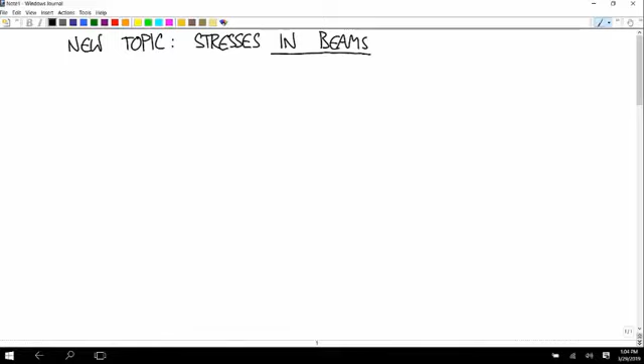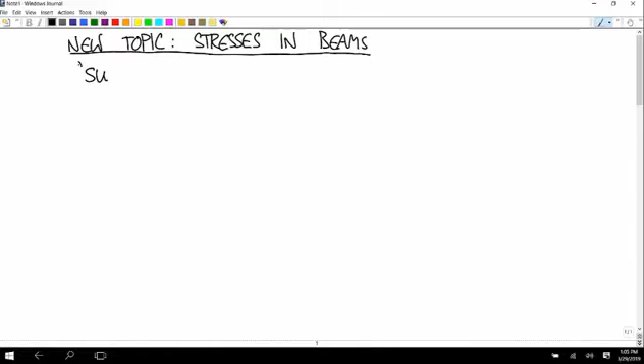The idea is based on the superposition principle, and that's a pretty common thing when you have small deformations. In our case, we're talking about small deformations. But anytime you have small perturbations from some reference position, that's when the superposition principle can come up. It's such a cool name for such a simple thing.

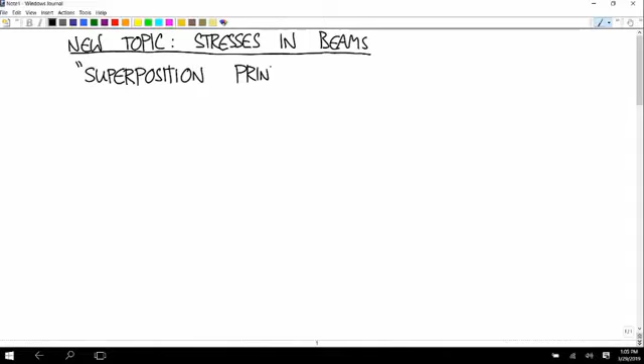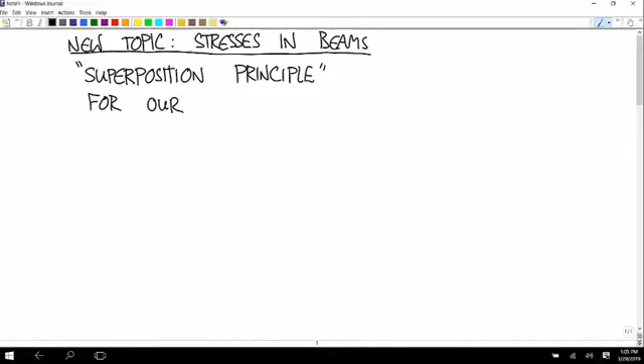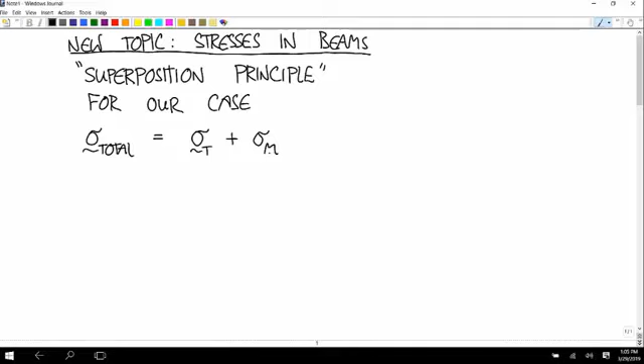The idea is just that, for our case, the only thing that matters is the fact that the deformations are small. The total stress tensor in a beam is equal to the stress tensor due to tension plus the stress tensor due to bending moment plus the stress tensor due to the shear force plus the stress tensor due to the torque. When I talk about adding these stress tensors, they add the same way vectors do, just element by element.

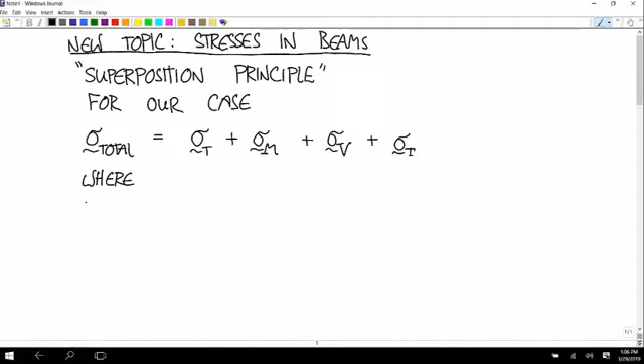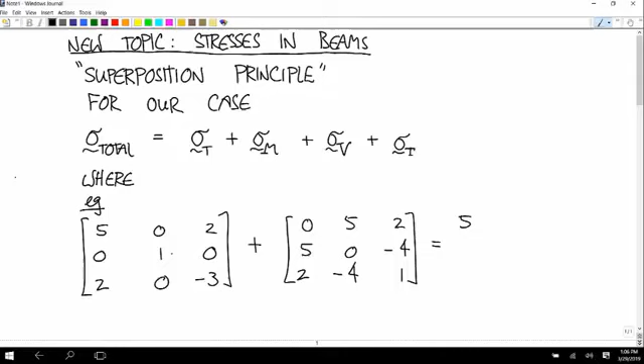For example, if you have stress tensor 5, 0, 2, 0, 1, 0, 2, 0, -3, and you add that to 0, 5, 2, 5, 0, -4, 2, -4, 1, you just add them up element by element. So 5 plus 0 is 5, 0 plus 5 is 5, 2 plus 2 is 4, 5 plus 0 is 5, 1 plus 0 is 1, 0 plus -4 is -4, 2 plus 2 is 4, 0 minus 4 is -4, and then -2.

I made those two symmetrical, and notice that if the two you're adding are symmetrical, the result also comes out symmetrical. So you never have to worry about adding stress tensors and getting something that can't be a stress tensor.

The reason this works is basically, you can imagine if you bend something really sharply, all the way down to a very noticeable angle, and then applied tension to it, those loading patterns would react in some unpredictable way. But if all these things are very close to their original configuration, because we're talking about very small deformations, you have to worry about that a lot less. You get good accuracy by just calculating those loads independently. First think about a bar that's in pure tension, calculate the stress tensor. Now think about a bar in pure bending moment, calculate the stress tensor. So that's what we're going to do, add them all together at the end.

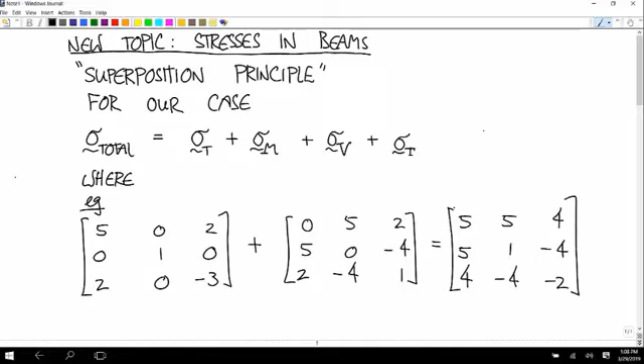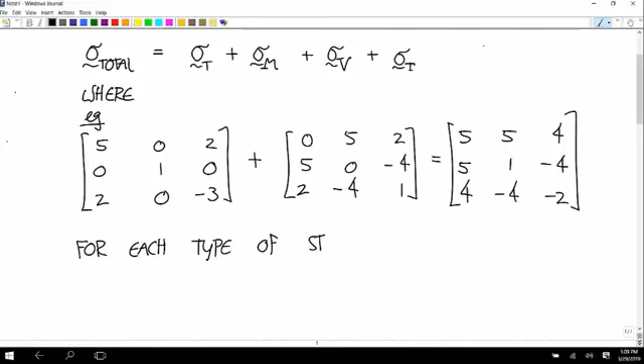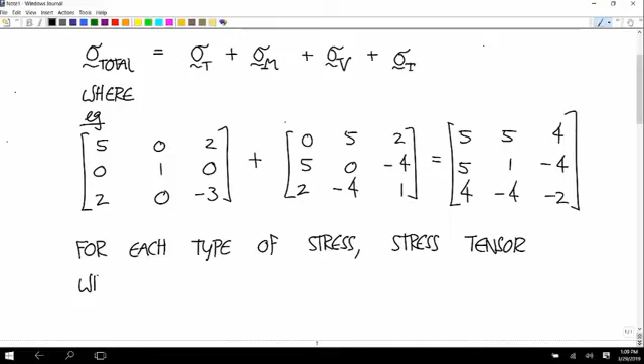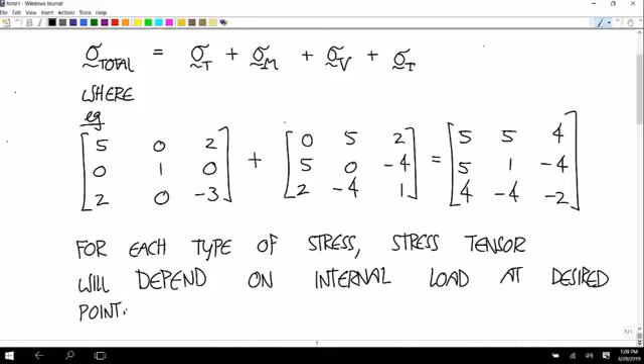And the general idea is, for each type of stress, the stress tensor will depend on the internal load at the desired point. So all the stuff we just went through for internal loads is going to be the starting point for the stress calculations. We're going to start with the easiest case.

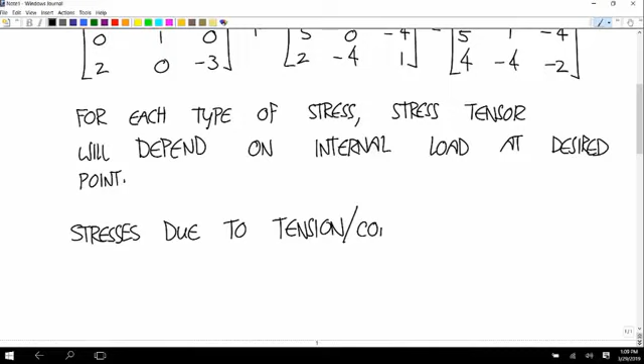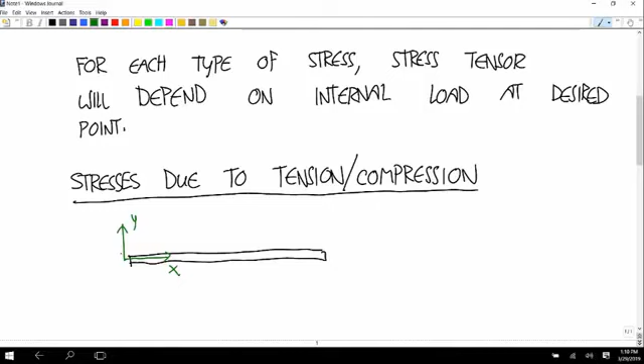So stresses due to tension and compression. We're going to use the coordinate system we've used in all our internal loads calculations, where the x-axis is along the length of the beam, the y-axis is up, and the z-axis is out towards us.

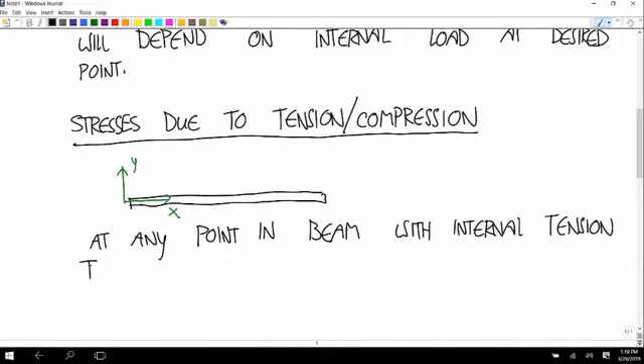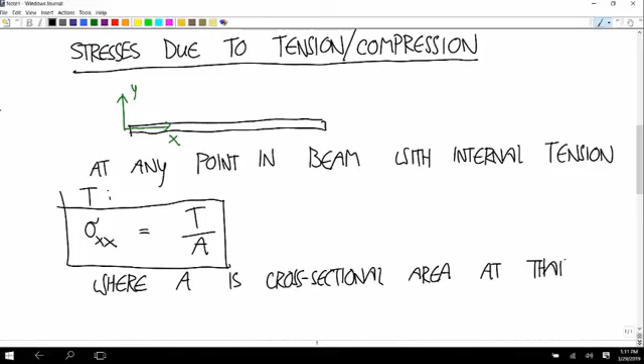At any point in the beam that has an internal tension T, the normal stress in the x direction is equal to T over A, where A is the cross-sectional area at that point. This doesn't say anything about where on the cross-section you are, because over the whole cross-section the stress is the same. It doesn't matter if you're near the top of the beam or the middle of the beam or whatever - all that matters is the x position.

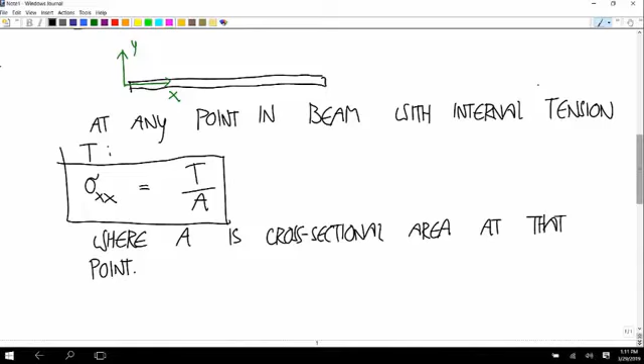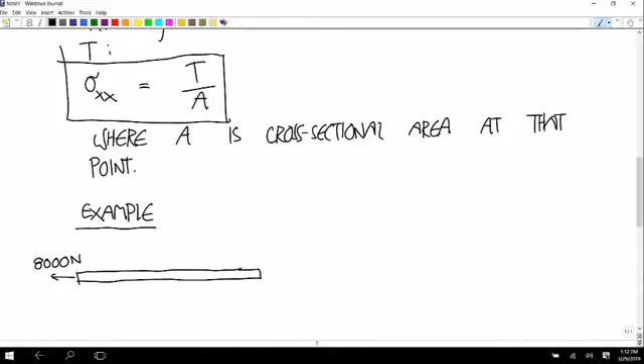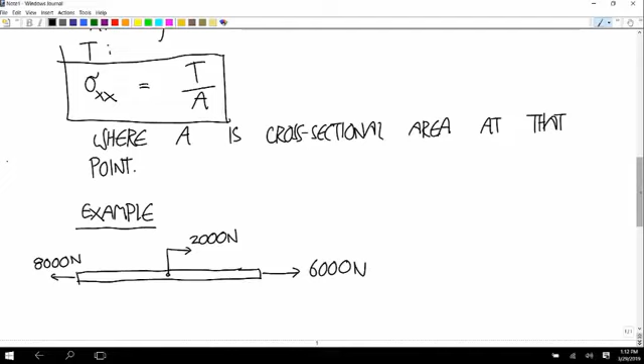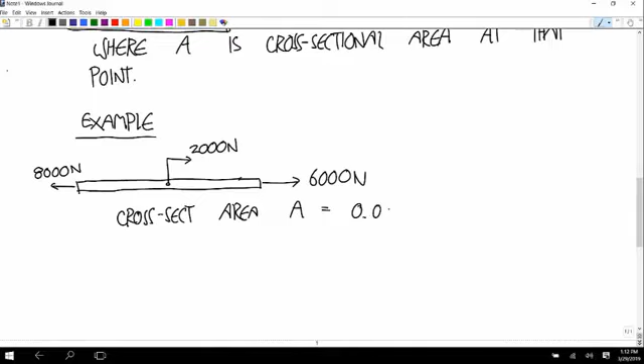Let's do an example. Let's say we have a beam where, when we figure out the external loads, there's an 8,000 Newton force at the left end, at the middle there's a 2,000 Newton force, and at the end there's a 6,000 Newton force. And the cross-sectional area, let's say it's constant over the whole thing at 0.001 meters squared.

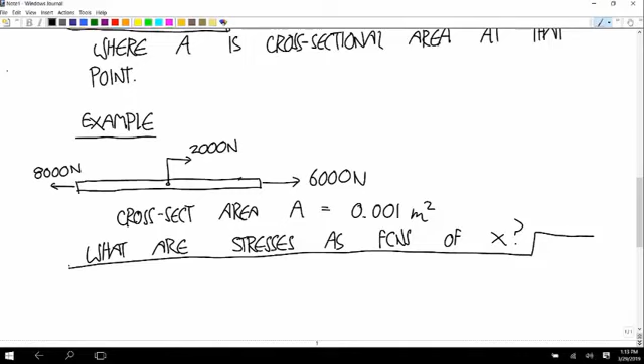So what are the stresses as functions of x? How is the stress in the beam going to change as you go along the length? We're always going to start by calculating the internal loads. So how many cuts do we have to make? Normally we'd have to calculate the external loads, but they're already given. Two cuts, yep. So the first cut is going to be for x between - I didn't say how long this was. Let's say 0.5 meter each.

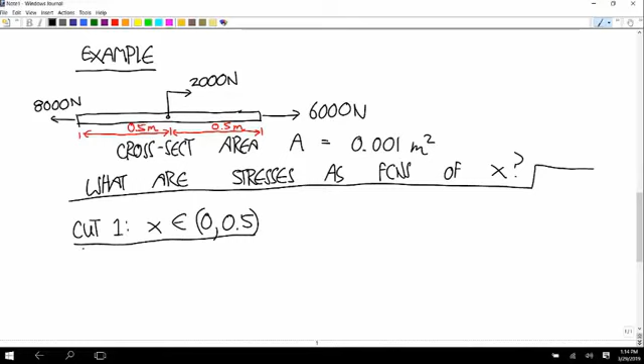Okay, so the first cut is from 0 to 0.5. We'll take some representative cut. We have the 8,000 Newton force at the left end, but we haven't gotten to the 2,000 Newton force yet. So the only other loads are the tension, the shear force, bending moment - all that stuff's going to be zero. All we have is forces along the x-axis here, so I'm just going to write it like this. But if you wanted to go through the full calculation, you could calculate shear force is zero, moment zero, fancy T is zero.

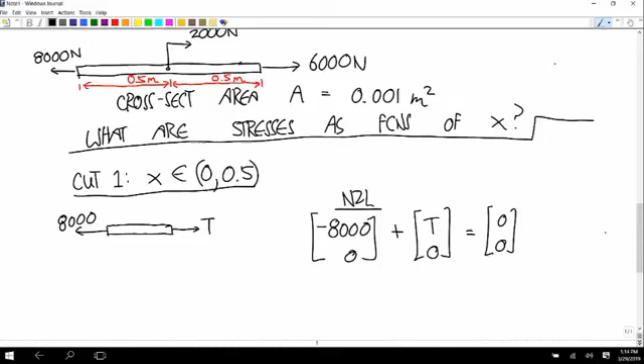And then Newton's second law says negative 8,000 plus T equals zero. So we got that T is equal to positive 8,000 for every x value between 0 and 0.5. And that's a positive value, so that means that that whole piece is in tension.

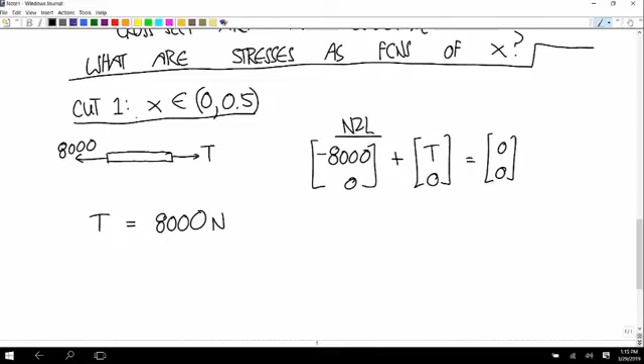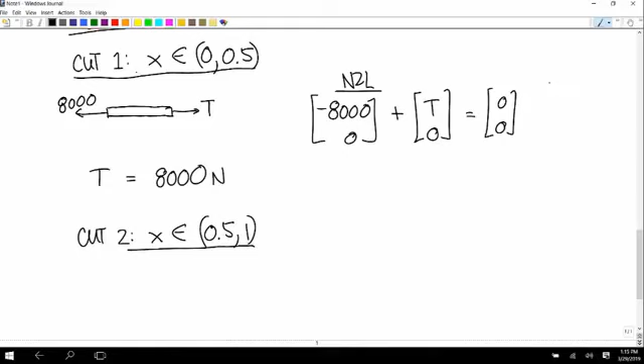And now cut 2 is between 0.5 and 1. So now we have the 8,000 here, and now somewhere else we have the 2,000 going the other way, and the tension. Newton's second law says negative 8,000 plus positive 2,000 plus T equals zero. And so T is equal to 6,000.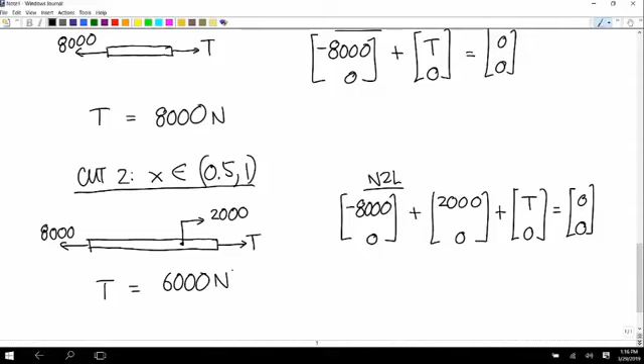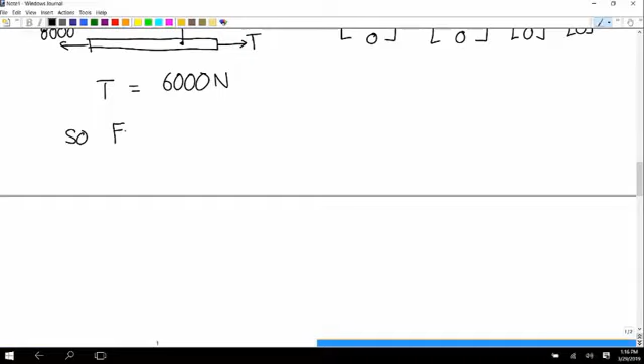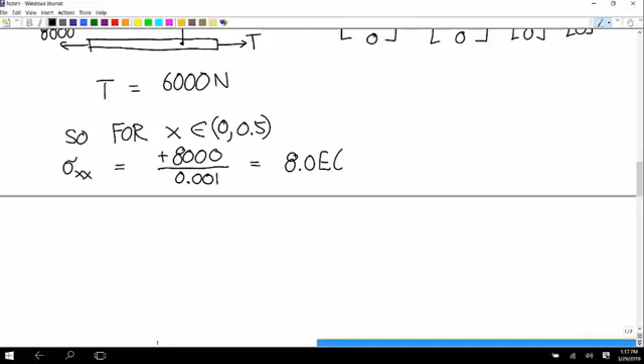So now that we have the internal loads, for any x values between 0 and 0.5, sigma xx is equal to positive 8,000 divided by 0.001. And so that's 8.0 times 10 to the 6 pascals. And if you wanted to give the full stress tensor, that's the XX element. So that's 8.0, 0, 0, zeros everywhere else, if you write it in megapascals.

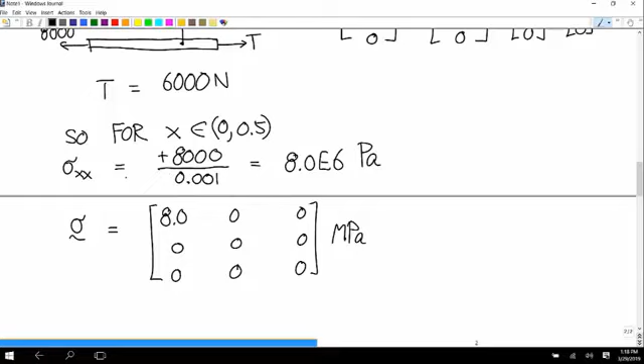And notice, if you think about what that means, a positive - so a positive tension as an internal load means the thing's in tension. A negative value means compression. And now think about the stress element, and it means the same thing. So we're going to use the sign that we get for the internal loads to calculate that stress, and it works out. The meaning makes sense.

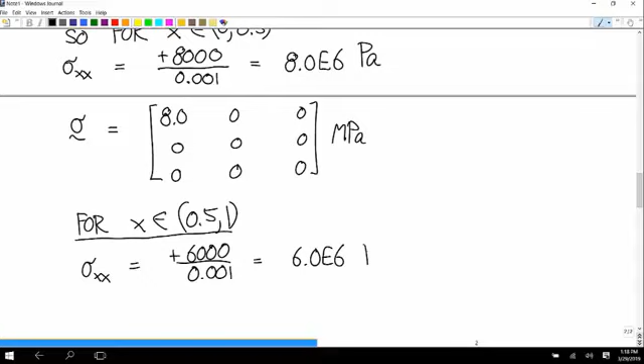And on the other half, for x in the range from 0.5 to 1, the XX stress is positive 6,000 divided by 0.001, and that's 6.0 times 10 to the 6 pascals. And so the stress tensor on that half, for any point on that half, is 6.0, zeros everywhere else.

In megapascals. So now what that says is, in this case, if you're trying to figure out where you're concerned about this bar breaking or deforming permanently or something like that, the place that you want to investigate is the left half of this beam. That's where the stresses are higher, and so that's what you're worried about. If it's good on the left half, then it's good on the right half too.

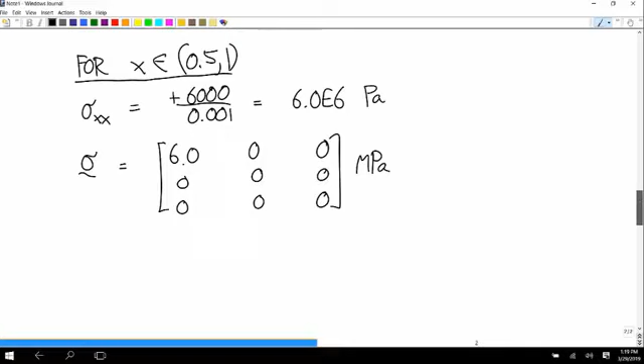Well, if the right half had a different cross-sectional area - say that the cross-sectional area got smaller on the right half of the beam - then it's possible that even though the internal loads are bigger on the left half, the stresses when you divide by the cross-sectional area would be bigger on the right half. So this is the best indicator of how concerned you are about fracture or whatever.

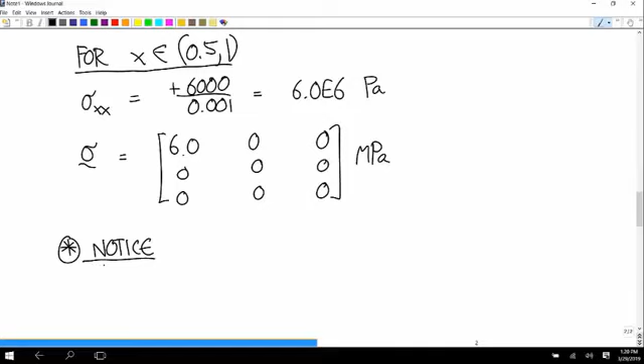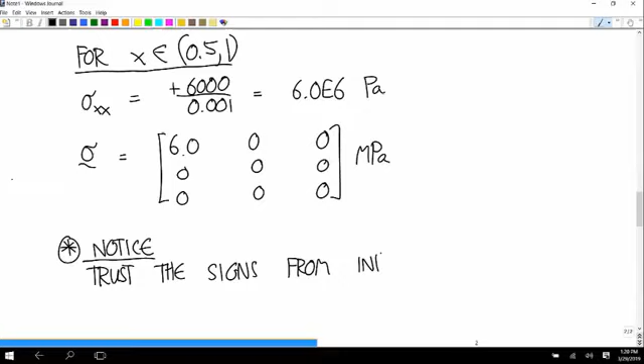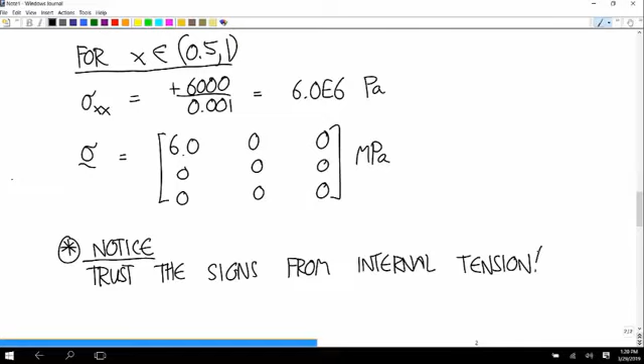Okay, so I want you to notice one thing: trust the signs from the internal tension. That's going to be true for every one of these calculations, I think - maybe not torsion now that I think about it, but I'm going to make a point out of it every time that it's a thing. So whether it's positive or negative coming from the internal loads, we use that signed value to calculate the stress.

Well, we don't know that it's going to break at all. We just know that there are different kinds of criteria you use for different types of materials to determine whether you think it's going to break. For very brittle materials, we'd mostly just want to calculate the maximum normal stress in this element, and then go to some table for our material and compare to the maximum normal stress you expect for that material. And if our value is higher, then we need to do something - either make the cross-sectional area bigger or reduce the load somehow.

For materials that can stretch more before they break, more ductile materials, metals, we would want to calculate the strain energy, which is a combination of the stress and the strain. We're not going to talk about those kind of things, but it's not like the calculations are hard - it's more just not really a part of this class because the criteria you use are so different for different types of materials. But anyways, so we would take our loads, calculate our stresses, figure out whether we think under those loads this thing is going to break or not. If it looks like it's safe, then we're good.